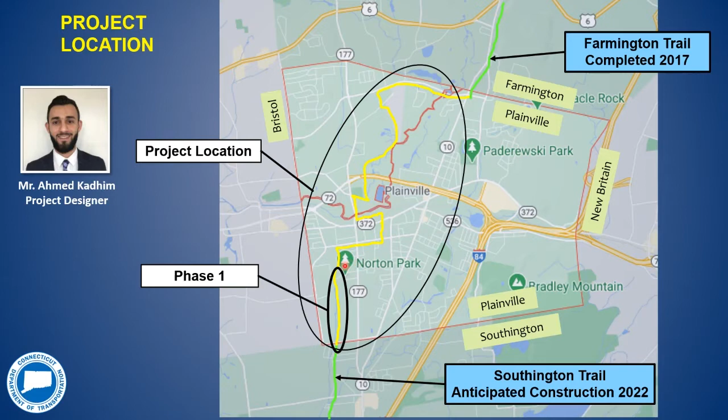The purpose of this project is to construct a multi-use trail known as the Farmington Canal Heritage Trail through the town of Plainville, to close the final remaining gap in the Connecticut section of the trail.

Through the state of Connecticut, the Farmington Canal Heritage Trail stretches from New Haven to Suffield, going for about 54 miles, crossing through 11 cities and towns.

The Farmington Canal Heritage Trail is an 81-mile multi-use trail connecting New Haven, Connecticut to Northampton, Massachusetts. The trail passes through urban, suburban, and rural areas and runs along abandoned rail corridors and canal towpaths.

It has been considered one of the most scenic and historic greenways in New England. Along the way are historic buildings, canal locks, the remains of canal aqueducts, and other rich cultural landmarks.

The trail shown here on this map, the entire Connecticut section of the trail has been completed with the exception of 2 miles in the town of Southington, which has an anticipated construction date of 2022, and the 5.3-mile gap in the town of Plainville.

It's also important to note that 47 miles of the Farmington Canal Heritage Trail is part of the East Coast Greenway.

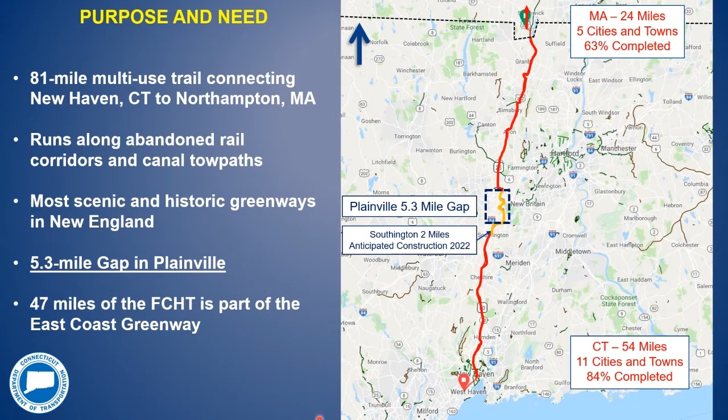The East Coast Greenway is a 3,000-mile walking and biking route stretching from Maine to Florida and connecting 15 states and 450 cities. It is a linear park separated from motor vehicle traffic that connects major cities, small towns, and

the nature around them. This infrastructure is designed to promote healthy lifestyles, sustainable transportation, and community engagement.

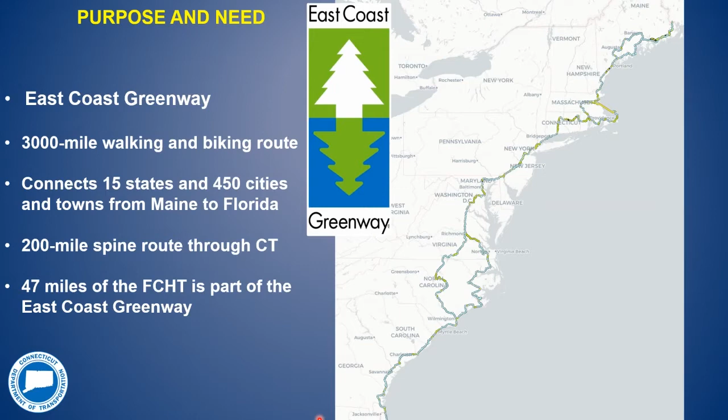200 miles of the East Coast Greenway passes through the state of Connecticut, and 47 miles of which is part of the Farmington Canal Heritage Trail. This highlights the importance of closing the 5.3-mile gap in the town of Plainville.

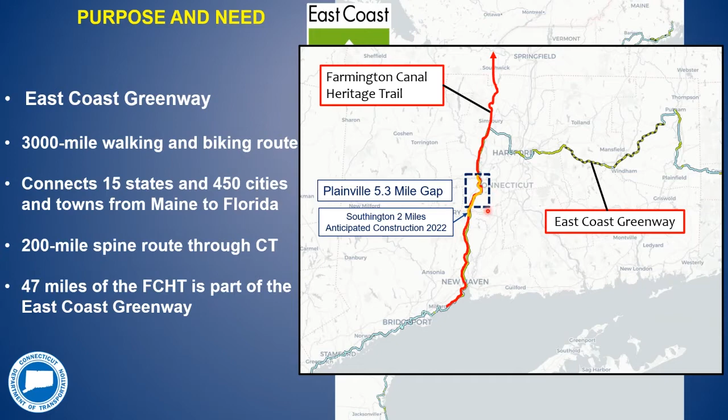The railroads in the town of Plainville are still currently active, and there are no abandoned railroads for the trail to be constructed on. So the town of Plainville, in coordination with Capitol Region Council of Governments, initiated the gap closure study in order to find a preferred alignment.

Various other local and regional agencies participated in the workshops, including Connecticut DOT, DEP, Town of Southington, and the City of New Britain. Some of the main factors that were taken into consideration were safety, off-road, connectivity, security, right-of-way, and environment.

At the conclusion of the study in February 2018, the green alignment shown here was chosen as the preferred alignment.

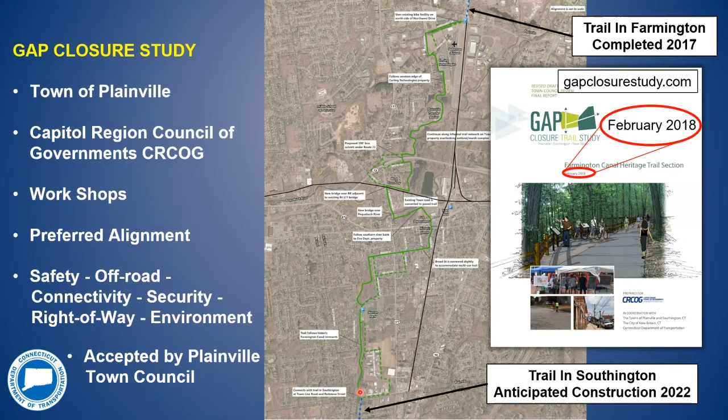Upon receiving the proposed alignment, our design team conducted several field investigations and has decided to break it into 3 separate phases in order to maintain construction continuity for the next 4 years. Highlighted here are the 3 phases.

Phase 1 will be from Town Line Road to Norton Park. Phase 2 will be from Route 72 to Northwest Drive, and Phase 3 will be from Norton Park to Route 72. Phase 1 is currently in preliminary design, and Phase 2 and 3 are at concept level.

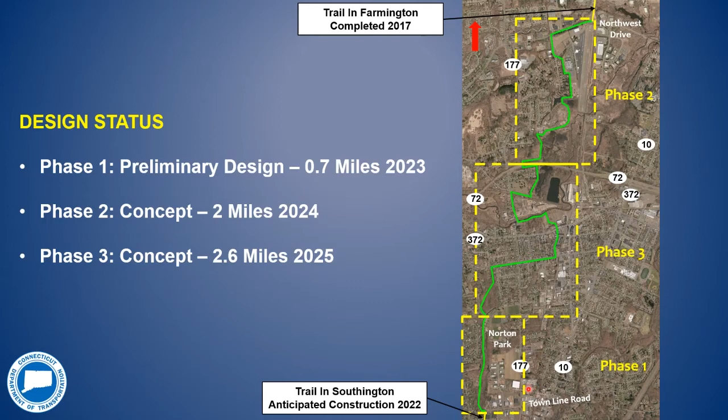And again, for tonight's presentation, we are focusing on Phase 1, which is from Town Line Road to Norton Park. Here is a close-up look at Phase 1.

The trail will pick up from the Southington Trail at Town Line Road and will go parallel to the Farmington Canal, utilizing an elevated berm known as the towpath, and will connect to Norton Park. This section is approximately 4,000 feet long and it will be 100% off-road.

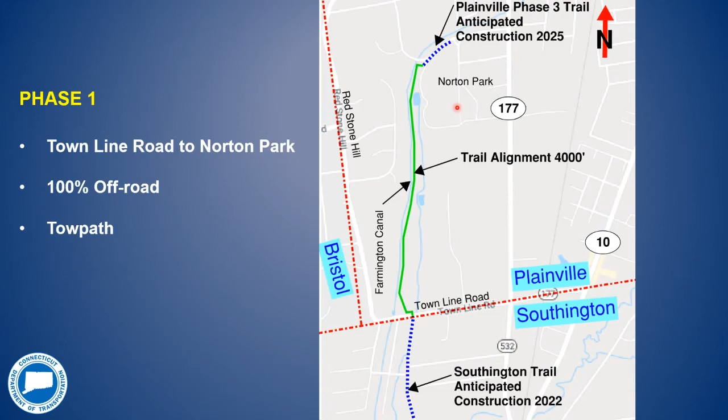So here is a look at the existing conditions in the area, and as stated, the trail will pick up from the Southington Trail at Town Line Road and will go parallel to the Farmington Canal, utilizing the towpath connecting all the way to Norton Park.

In this section here, we're proposing a boardwalk to traverse some wetlands and a couple of pedestrian bridges in this section and in this area to close the hydraulic breach in the towpath.

We're also proposing a parking lot on these couple of lots where there's currently no houses built and no one resides. We're also proposing benches along the trail and kiosks and historical signs.

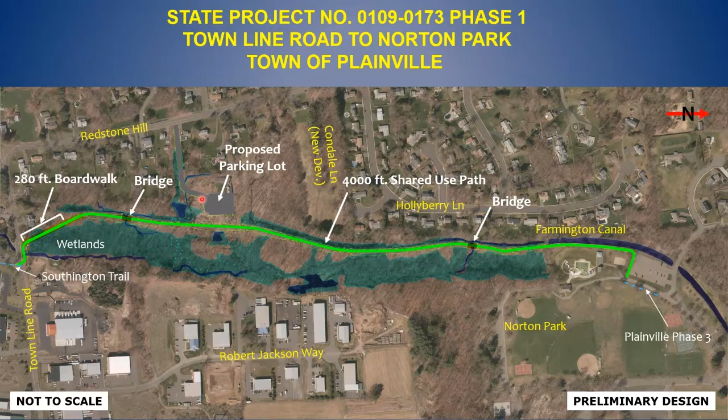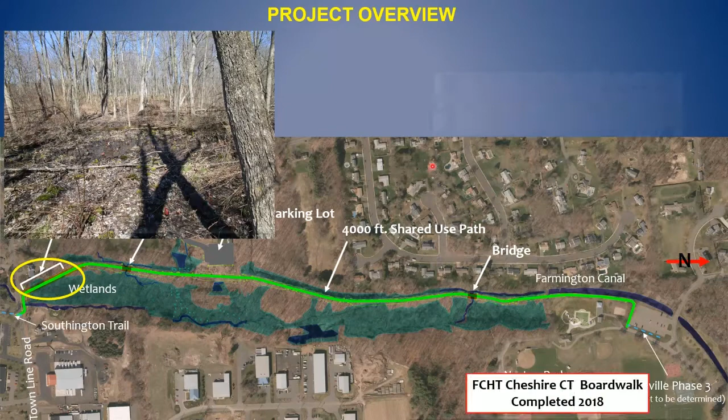Here is a look at the existing conditions of the wetlands in the area, and this is where we are proposing a boardwalk. The boardwalk will be precast concrete with wood railings on both sides.

It'll be approximately 13 feet 3 inches wide. And once constructed, it'll look like this boardwalk that was recently designed and built as part of the Farmington Canal Heritage Trail in the town of Cheshire, Connecticut.

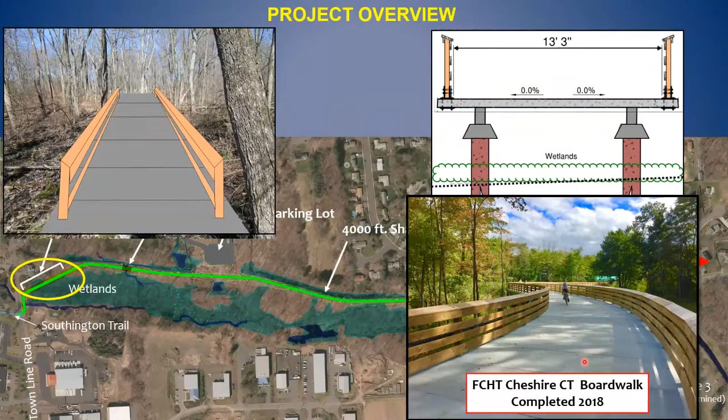Here is a look at the hydraulic breach in the towpath, and this is where we're proposing a pedestrian bridge. The bridge will resemble the boardwalk and have the same width. Once constructed, it will resemble this bridge in the town of Cheshire, Connecticut.

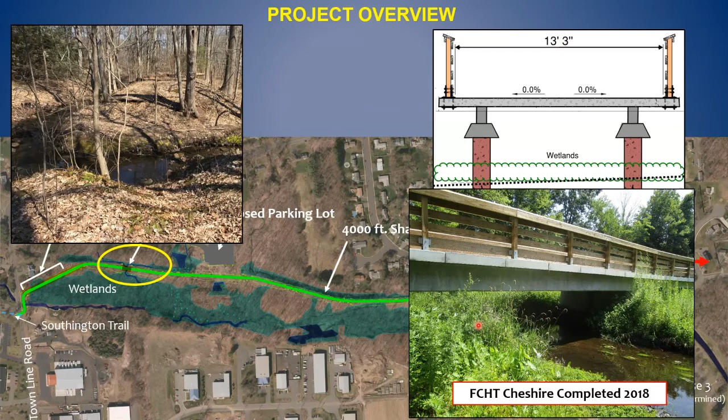Here is a look at the existing condition of the towpath, and this is where we're proposing the multi-use trail, which will be a 12-foot wide paved path with 2-foot grass shoulders on both sides. Once the trail is constructed, it'll look like this section, which was recently designed and built by this team as part of the Farmington Canal Heritage Trail in the town of Cheshire, Connecticut.

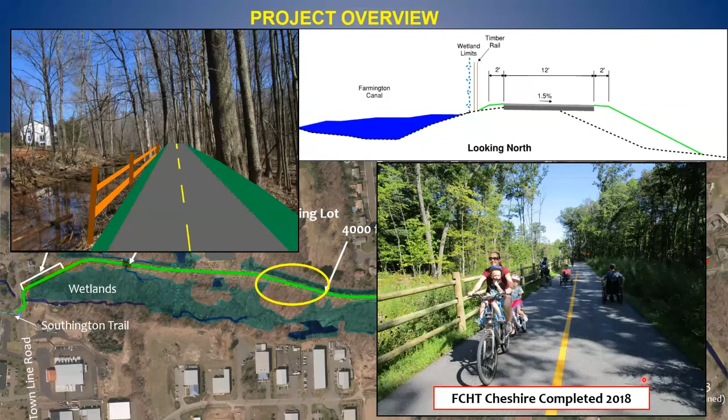Here is a close-up look at the proposed location for the parking lot. The parking lot is proposed on these two lots where there's currently no houses built and no one resides. The parking lot will have approximately 53 parking spaces, and the entrance for it will be from Redstone Hill Road, shown here.

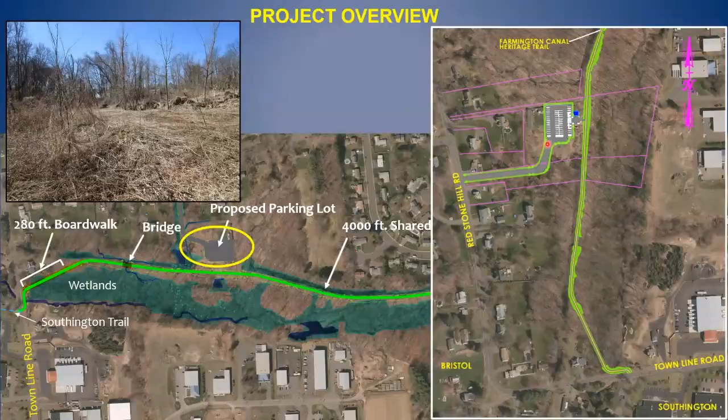The proposed parking lot will look similar to the one shown here in Cheshire, and a parking lot is needed for this location, as the nearest two parking lots are 1 mile to the south and 5 miles to the north, and have less than 25 parking spaces and are currently used to their full capacity.

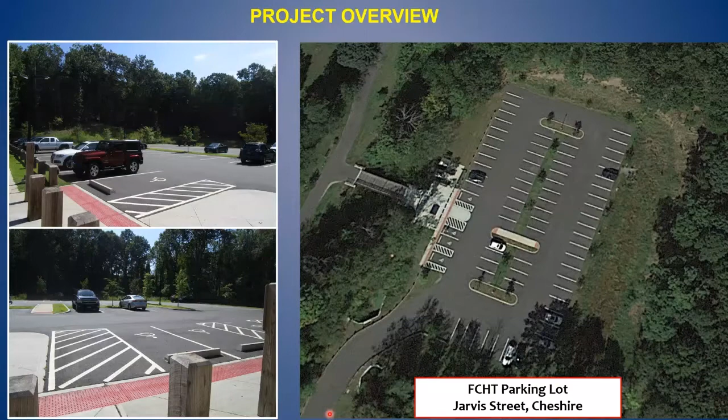As a federally funded project, this undertaking must comply with Section 106 of the National Historic Preservation Act. Historic properties assessment undertaken through the Connecticut DOT Office of Environmental Planning has revealed that the project will affect remnants of the Farmington Canal, which is a resource listed in part upon the National Register of Historic Places as a linear district.

This is through placement of the new multi-use trail upon the embankment that once formed the towpath of the canal. The department expects to take precautionary measures to ensure this work will result in no adverse effect to the district. No other historic property impacts are anticipated, and consultation with stakeholders is ongoing.

Our design team has been coordinating with the Plainville Historical Society and has met with the members to discuss the proposed project and the proposed historical signs. The Plainville Historical Society and its members are in support of the project and believe that it will make it easier for the public to access the site and learn more about the history of the canal.

The project is anticipated to be constructed in spring 2023, and one construction season will be needed for the project. A temporary access road will be needed for construction of the boardwalk, and no traffic detours will be needed for this project.

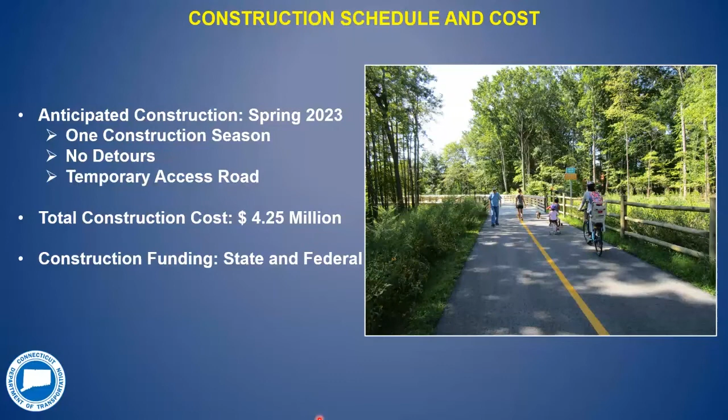The total construction cost will be $4,250,000, and construction will be state and federally funded. Seven partial property acquisitions, and 2 lots where there is currently no houses built on them and no one resides there, will be needed for construction of the trail and the parking lot.

I am Matt Giannakopoulos, and I am a right-of-way coordinator with the Department's Division of Rights-of-Way. It is our office's responsibility to acquire the property rights needed for transportation projects. The proposed project design requires the acquisition of property rights, so I'd like to give a brief overview of the Department's right-of-way acquisition process.

Please keep in mind, though, that the specific impacts are still being fine-tuned and may change as the design progresses. Any property rights will be acquired in accordance with Connecticut General Statutes Sections 13A-73 and 13A-98E. Whenever there is federal money used in any phase of a project, the department must adhere to the Uniform Relocation Assistance and Real Property Acquisition Policies Act of 1970 as amended.

Once the design has moved to the point where we are ready to begin the acquisition process, each affected property owner will receive a formal letter of intent to acquire from our office, along with a property map which depicts the exact property rights to be acquired.

At that point, our office will determine the fair market value of those property rights and use that value to establish an offer of just compensation.

The offer will be sent out to the owner in writing, and a right-of-way agent will be available to meet with the property owners and explain the project, go over the specific impacts to the property, and explain how the state developed its offer. The property owner will have a reasonable time to consider the state's offer and enter into negotiations.

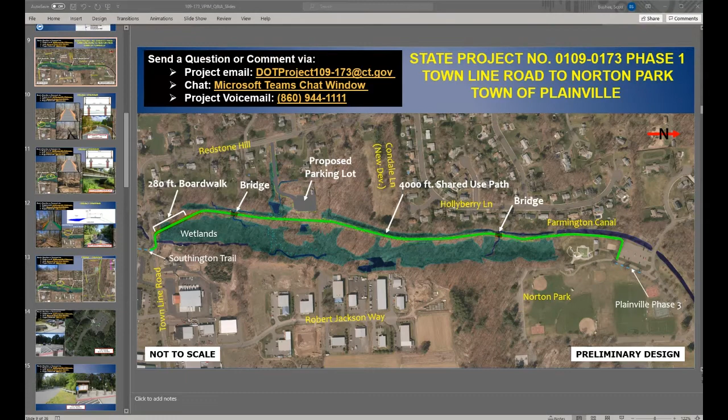The parking lot being proposed off of Redstone Hill really provides a nice connection to that neighborhood. Anyone living in those communities off of Hollyberry, Redstone, or that area of town is going to be able to bike or walk right out of their backyard and access the trail very easily. So I think it's going to be a nice thing for your community and a good asset.

Ahmed mentioned that we're going to provide kiosks with the project. We'll do that at each end, and that's going to allow opportunities for the town to sign regulations and post any informational materials they like. We'll also provide a kiosk at the parking lot with additional information for the trail, regulations, hours of operation, things like that. Sometimes towns post speed limits, but those kiosks will facilitate that as well.

What's next, Bill? Thank you, Scott. Through the chat box: are trail cameras going to be implemented for additional safety to users and nearby residents and homeowners? What time does the trail legally close to the public?

So trail cameras are not part of the design. That's certainly something the town could add later, but it's currently not part of our design. The hours of operation will be controlled by the town. We'll provide informational kiosks at the Southington end, the parking lot, and also Norton Park, and that's where hours of operation could be posted. DOT is here to build this trail really for the town of Plainville. It provides connectivity and pretty valuable pedestrian and bicycle infrastructure. But we're here to build this for the town. The town will end up taking ownership and maintenance for it when it's complete, and the town will have the ability to regulate it as they wish. So I hope that answered your question. What do we got next, Bill?

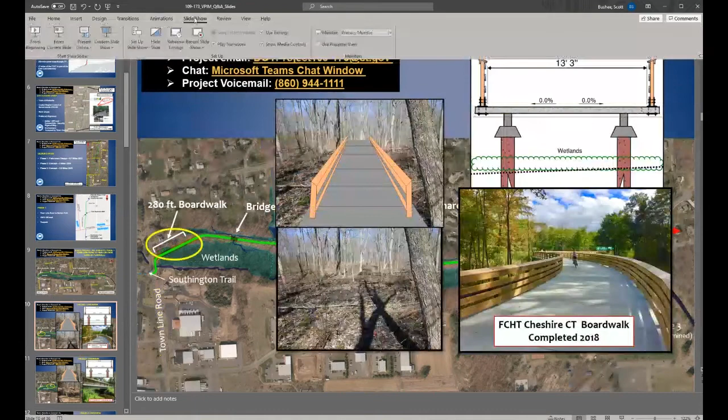Okay, thank you, Scott. Coming from the chat: will funds be available for fencing to block out the path? Fencing under the project is going to be limited to what's shown here in the picture. Along the boardwalk and the bridges, there'll be timber fencing, kind of what's shown here. Along the trail itself, it's going to be a 3-rail wood fence. It's not a privacy fence. It's really a fence to protect people from getting into the canal and keep them on the alignment of the trail. Anything beyond that, when DOT's done constructing the project, we're going to turn it over to the town. The town will have authority over it and maintenance. If additional plantings are desired, that's something folks could put in later if they wanted to, but they will not be privacy plantings per se with full screening as part of the project.

We will be doing a landscape design with the project as a restorative effort in areas where we disturb trees for construction of the bridges and boardwalk. We will be replanting those areas, and the intent is really natural growth and reforestation of these areas to grow up kind of as they are now, but not a row of arborvitaes as you might think for screening purposes. Thank you for the question.

Okay Scott, coming in from the chat: how is the trail/trash maintenance monitored? Is that a town responsibility, or are organizations formed to monitor? I'd say it's both. Initially it's a town responsibility. The town will have maintenance responsibility and authority to regulate the trail when it's completed, as the town desires. But what we've seen in other areas, there certainly are community groups that form and do plantings and maintenance along the trail, and that may happen in Plainville too. That's certainly a possibility, but the DOT will not be providing maintenance as far as trash pickup and things like that along the trail. It's going to be with the town, but frequently there are community groups that step up and help out with these sort of things. Initially, yeah, it does lie with the town of Plainville. Thanks for the question.

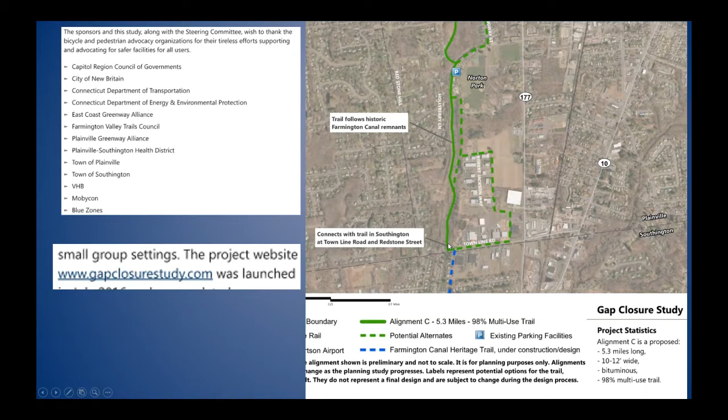There was a lot of work done to go through this gap closure study, and a lot of meetings. I've got a slide here that indicates the meetings, I believe. Numerous neighborhood meetings were held, and this is the preferred alignment that came out of it, the solid green line. So that was all addressed as part of the planning study for the gap closure project that was done. We're not here now to go back and redo all that previous work. I'd encourage you to go back and read the study from gapclosurestudy.com, which would have additional information you're looking for.

www.gapclosurestudy.com. Next question, Bill. Okay, from the chat, Scott.

Why is it necessary to use eminent domain for securing property? A landowner in Cheshire was required to sell property even though they granted access for the trail through their farm, which then caused them to lose access to the opposite side of his property. Do you want me to reread that, Scott? No.

So I'll just briefly describe the rights-of-way process—we don't have to use eminent domain here. We've got about 6 properties that are private residential that are affected, that we need to buy a corridor through to put the trail. DOT is going to do an appraisal on the property, and there'll be a discussion and negotiation attempt with the property owner to reach a mutually agreed upon value.

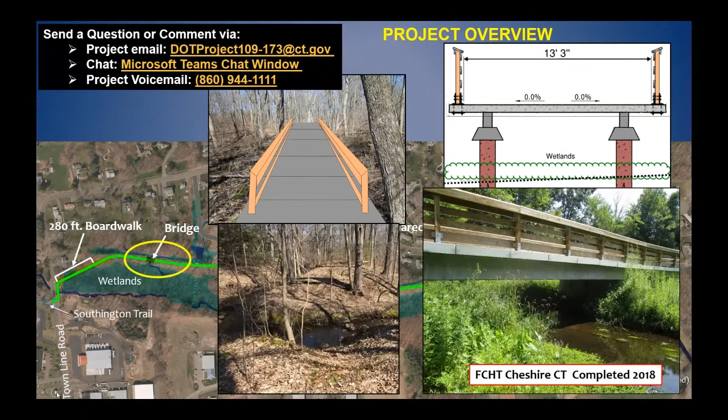Usually what happens at those meetings, the property owner expresses some concerns. We try to meet them to the extent possible with the design. There's usually some back and forth, and at the end there's a highest and best offer made to the property owner. If we can't reach an agreement, that's the only time the state would typically move ahead with eminent domain. What eminent domain means is DOT would move ahead with the rights-of-way process, but the money is still there for the property owner. And if the property owner chooses to file an appeal, which they have the right to do, that's an appeal for greater compensation so they have an opportunity to get paid more than what the state had felt was the best offer.

But the state would still move ahead with the project. Just correcting you, it doesn't have to be an eminent domain situation, and we would hope to avoid that. We would hope that we can come to an agreement when we talk.

But if there is a conflict and we're not able to reach an agreement, then the state would utilize that tool. Now, as far as concern for access to the rest of the property beyond the trail, I think I have a slide here that shows some of the affected properties. We can discuss that briefly.

So this particular property here, 190, has quite a bit of land on the back side of the trail. And if that's something that property owner wanted to retain, we can discuss that. The state doesn't necessarily have to own all of this property, but that's something we can discuss if the property owner has interest in retaining rights to it in some way. I won't give a commitment here tonight, but it's certainly things we can discuss. But thank you for bringing it up.

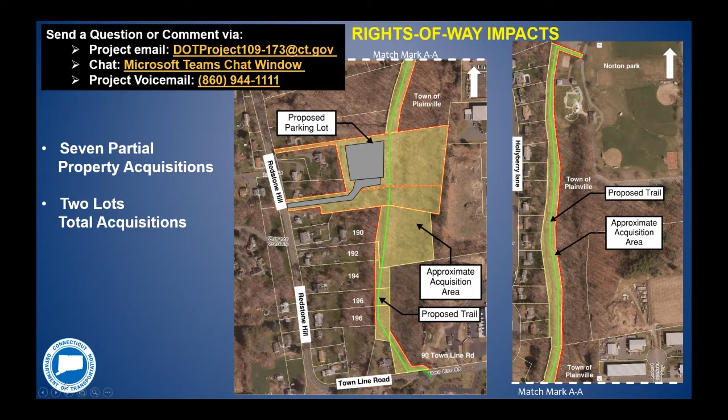I think it's really probably a better question to take up with us offline. If you send us an email with your contact information, we're more than happy to reach out to you and have a talk about your specific situation, which property you want to retain beyond the trail, and your intended use for it. We'll see if we can work something out. So Bill, thank you for that question. What do you got next?

Why is the cost at $4.25 million for 0.75 miles?

Well, we've got asphalt construction. We've got almost 300 feet of boardwalk, 2 bridges, and a 53 space parking lot. And that estimate is the full construction estimate. That includes incidentals during construction, contingencies, every item. That's the full construction, that's the price based on current information that's out there based on roadway projects.

And if you'd like more detail on it, maybe reach out with your contact information, and I'd be certainly willing to go through the details of the specifics on what each piece of it cost. Thanks for the question.

Okay Scott, we have from the project email: The East Coast Greenway Alliance has been involved with the development of the Farmington Canal Heritage Trail for nearly 30 years. The design team at CTDOT has been open and accessible to both advocates and detractors. The trail will be a boon to the town, the region, and the state as a spine trail designated by CTDOT in the last active transportation plan of 3 years ago. Our thanks to the town, DOT, and elected officials for their support for this valuable project. Thanks again for the positive support, we very much appreciate that.

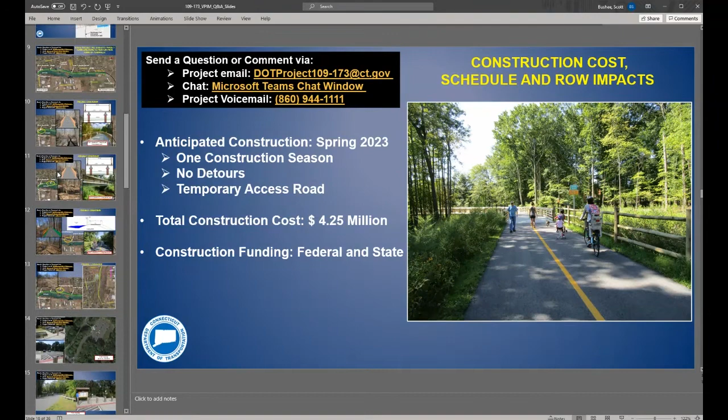Thank you, Scott. Comment via the chat box: leadership in completing the East Coast Greenway. So the comment is just leadership in completing the East Coast Greenway. Positive support, thank you, we appreciate that.

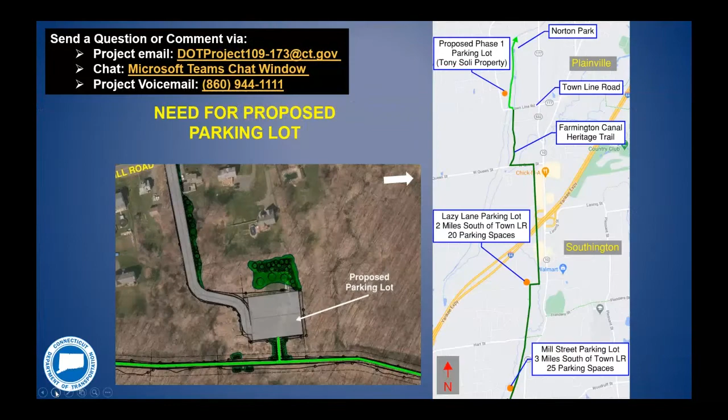Thank you. And then following along those lines, Scott, do you mind heading down a couple slides to the ones labeled trail users, that show existing vegetation growing up and behind fencing and adjacent to the trail that is just grass.

And that would be the same case in Plainville too. So you're going to get material growing behind the fence that will provide some level of natural screening, but it's not going to be a hedgerow of arborvitaes.

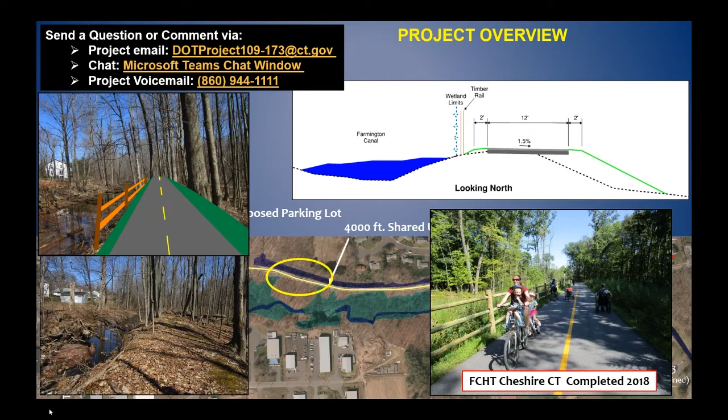As explained a few times tonight, we've got the 3-rail wood fence going in here, which will certainly help keep trail users on the trail. In the sections where the canal is, which is most of the alignment, you have residential properties, but the canal is a pretty good barrier to keep people away from those properties during the summer months. But within the project, we have this 3-rail wood fence that's going to go in, and that is the safety measure. Anything beyond that, there's local police, but we really haven't had a history in Connecticut of crime associated with these trails.

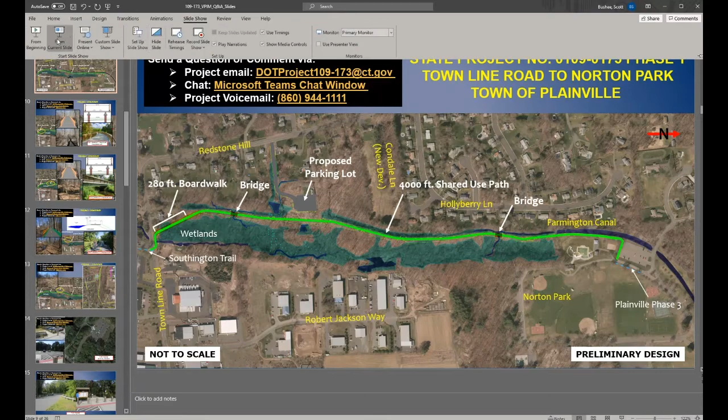This was a comment that came in earlier. Why is it necessary to use eminent domain for securing property? A landowner in Cheshire was required to sell property, and even though they granted access for the trail through their farm, it caused them to lose access to the opposite side of their property. We covered this question earlier, and DOT does not need to use eminent domain. Our goal would be to work out a mutually agreeable acquisition price, and we'll try to achieve that. If a few of these properties have an interest in maintaining land on the opposite side of the canal or the trail, that's something we can discuss. If you didn't provide your contact information with the comment, please reach out to us, and we can meet with you one-on-one and discuss your particular need. We do not have a need to use eminent domain, and we'd like to come up with a mutually agreeable solution.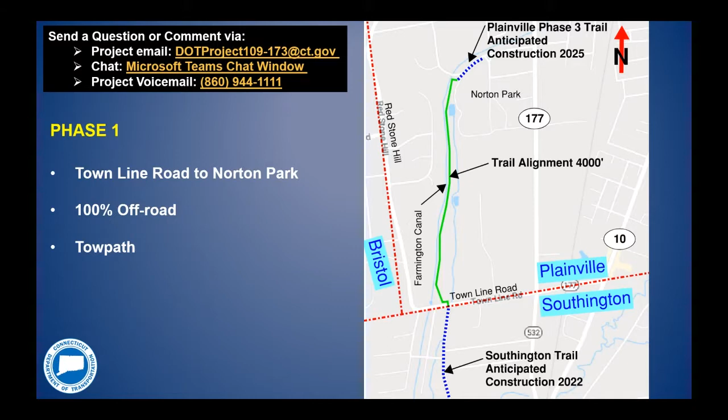Who will be maintaining these fences? The town of Plainville. DOT will be providing the trail construction, and then after it's built, both the land and the maintenance will be turned over to the town. So this is going to be the town's trail to own, to maintain, and to regulate as the town wants.

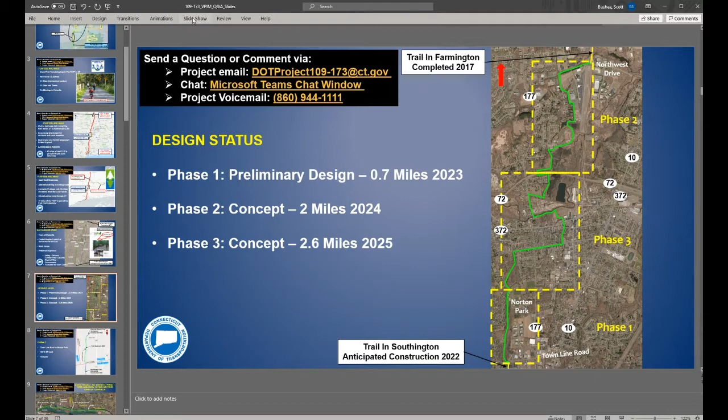Is it possible that additional resources can be dedicated to the other 2 Plainville sections in order to get an earlier completion date? We have 2 designers working on Plainville concurrently, and it's a full-time effort. Phase 1 is at the 30% design stage, and I would say we're actually a little bit ahead of schedule on phase 2. We're not presenting that here tonight, but we did make quite a bit of progress in design on phase 2. We've got a lot of the survey work done, and we've done some work on phase 3, so we're not that far behind. If you look at the construction schedule we discussed, 2023 for starting phase 1, phase 2 in 2024, that's a year behind. Once we start phase 1, they're going to follow in sequence pretty quickly. So I hope that helps out with your concern as far as us getting to it.

Thank you for the comment, and thank you for the support.

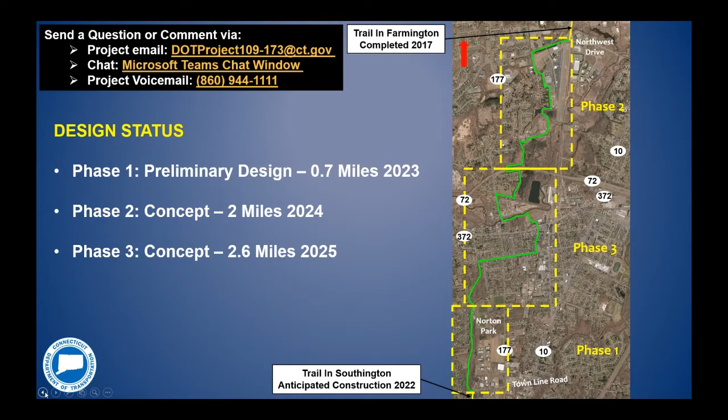This is actually a repeat.

This is actually a repeat. I support and approve this design and will use the trail as soon as it's complete and open. I will be riding my bike from the north and using the parking lot in Farmington and Avon, and from the south using the parking lot in Cheshire. Thank you.

We appreciate your feedback and support. Thank you very much.

Okay Scott, we have from the chat: you have absolutely no thought to the people you will be impacting. Shame on you.

Well, thank you for that comment too. As I mentioned, that's part of the reason for tonight's meeting is for us to get feedback from everybody, positive and negative. Thank you.

Okay Scott, from the chat: I just wanted to say thank you for the work that has already gone into this and express full support for the project. I live in Southington and go cycling often in both directions, south out of Southington or north out of Farmington. Having off-street access between the two main branches is important to me and my family. Considerations for phase one are consistent with the way other recent successful trail development in Cheshire most recently has gone. I'm excited for this part to begin.

Thank you for that comment. We do appreciate it.

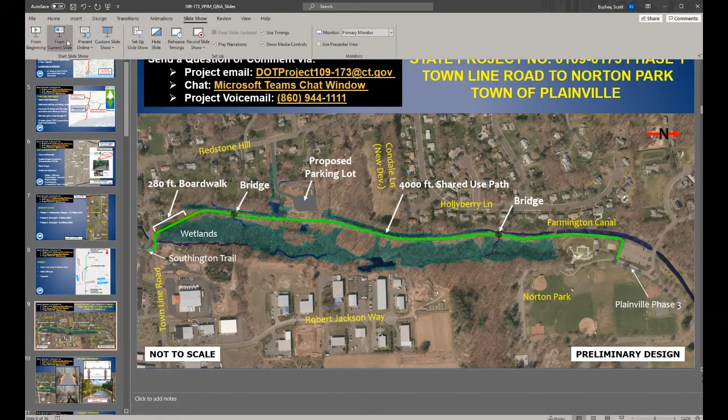Okay Scott, from the chat: has the state fully obtained the Solely property as of today? The state has not obtained any properties, and we do not before the public involvement process. We have had discussions with the property owner about our intent for a parking lot, and we spoke with him about what his intent was for use of the land. We had those talks about 2 years ago and have stayed in touch, but we have not made any acquisitions at this time.

Thank you for the comment. We have a couple comments coming in from the chat, thanking the design team for the hard work and for support of the project.

Okay, Scott from the chat: Stop saying the distance between the houses and the towpath is a lot. I invite you to my house to view the actual distance. We want funding for fencing on our own properties to block out the view of the trail and the people you are putting in our backyards, and the privacy that you're disrupting. Sorry for butchering that, I apologize.

Thank you for the comment. It's come in a couple times tonight. We got it, we're hearing concern from the folks along Hollyberry, these houses, and how close the trail is to their backyard, and requests for privacy fencing. But thank you, that's part of the reason for tonight's meeting is to gather feedback.

Thank you, Scott. Okay, we have a comment that came into the chat: As one of the many active users of the Heritage Trail, I want to thank the project members for their efforts to close the gap in such a wonderful resource. Hopefully the issues of the limited number of detractors can be resolved in a timely fashion so that this unfortunate remaining gap can be finished. Keep up the good work.

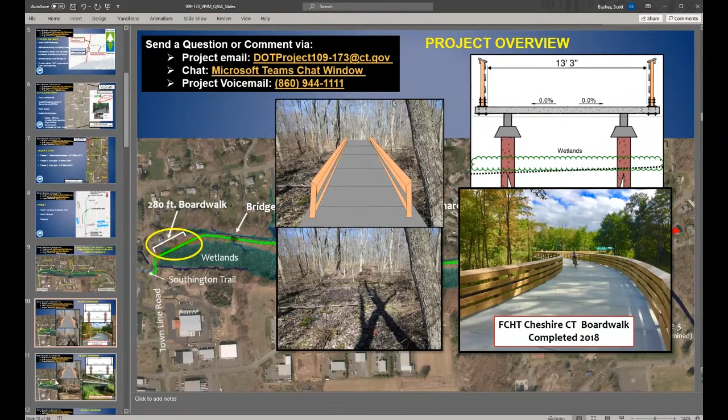I did inform the town. I was told to inform the police. I would like to know about the old growth tree destruction along Condale and Hollyberry. My property supports old growth tulip trees, which support egg laying by black swallowtail butterflies. I also had a sighting of a bald eagle and red-winged hawks. I made this presentation at a town meeting to no avail.

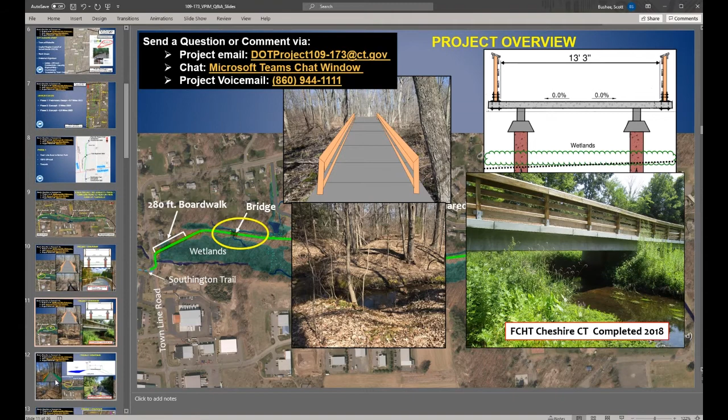That's again something that's very property specific, and I'd like to meet with you individually to discuss those things. If you haven't provided your contact information in the chat, an email, or a phone call to us, please do, and we can reach back out to you and discuss one-on-one. We can go out and meet on your property and discuss the limits of tree clearing. If you have certain trees you're very concerned with, we could look at those.

Predominantly in the section of the towpath, we're not going beyond the edge of the canal with any clearing, just the top of the towpath to construct the trail. So it would be really limited to trees just along the towpath. But I am interested in listening to you and seeing your concerns, and certainly willing to meet with you on site or virtually, one-on-one. So please provide your information and we'll reach back out to you. Thank you.

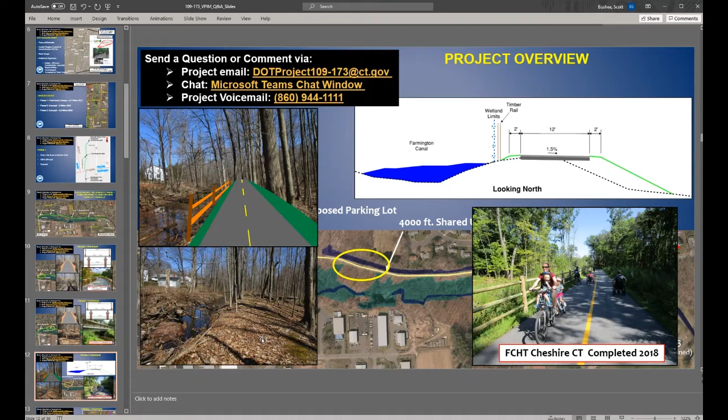Okay, coming in from the project email: I want convenient access to the trail. Putting the trail in my backyard is awesome. Well, thank you for your feedback, we do appreciate that.

I think for a lot of folks that are in the neighborhood areas around Hollyberry and Redstone, the driveway into this parking lot is a nice conduit right to the trail. For those that are interested, that will be a good feature for your neighborhood to be able to enjoy this resource when it's completed. But thank you for the comment.

Okay, coming in from the chat: How are you planning on crossing Town Line Road with the high traffic volume and excessive speed on the road? Will you be putting traffic lights in or something else to slow the traffic down so people do not get hit crossing the road?

There will not be traffic lights. I appreciate your comment tonight, and we'll take a look at more detail in the specifics here, but at this time we're not proposing a traffic light. Thank you for the comment. Safety is something we're very concerned about too.

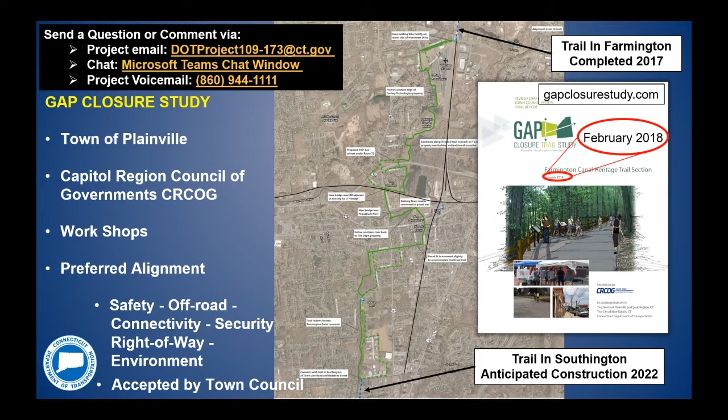Thank you, Scott. From the chat: why did you not go on the other side of the wetlands away from residences? So again, how we got here tonight with the alignment is in gapclosurestudy.com, and there's a lot of information in that report that led to this particular alignment. I don't want to revisit all those meetings that were had prior to 2018, but the information is there if you want to look at it. If you look at the plan we have tonight, look at all the wetland areas and water courses through here - we did our best to pick the most environmentally sensitive alignment we could. The towpath is already disturbed; it was man-made and previously constructed, so using that doesn't disturb other native soils. There's not a lot of mature tree growth on it to be cleared - the trees are pretty small compared to the other wooded areas. So we're on the alignment that was chosen for the gap closure study, and the reason is it's the most environmentally sensitive way to get through this area.

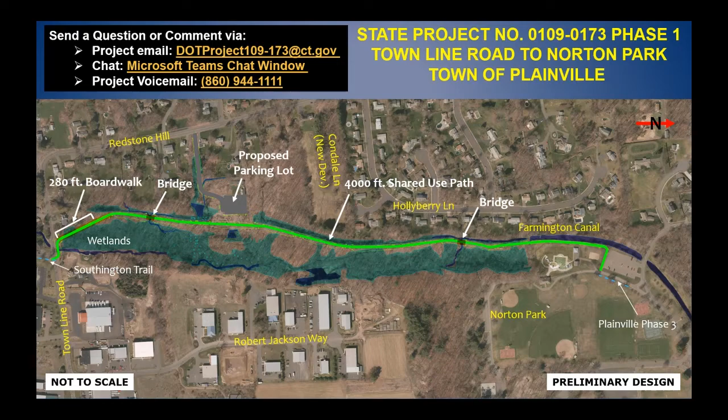Now Ahmed, if you don't mind sharing your screen again and pulling up the survey, this will be on the civil rights slide. And folks, while that's going on, I want to reach out again to those of you that expressed concern and live directly within this trail section. Those of you that reached out and noted specific property concerns, please make sure we have your contact information. The design team is interested in reaching out to you, meeting with you at your property. We're more than happy to walk the trail alignment with you and discuss your specific concerns and see what we can do to best mitigate them. We're definitely interested in working with you one-on-one. You guys are the most affected by this, so please make sure we have your contact information so we can discuss your concerns directly with you.